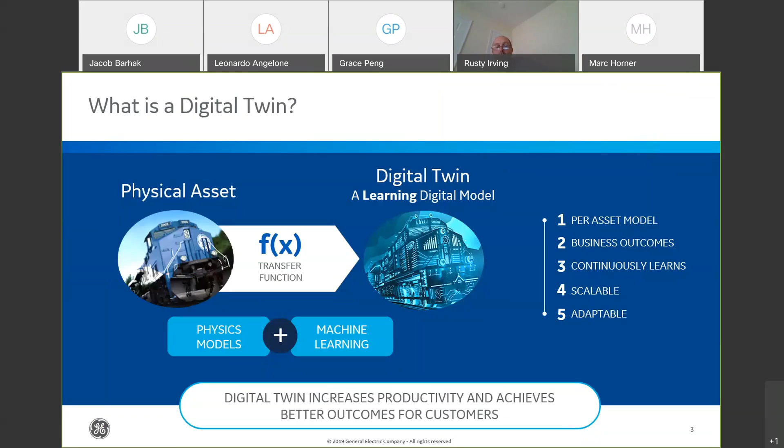For instance, it takes a lot just for one engine type to monitor 5,000 of these things — you need a lot of computer power. They're also very expensive to develop. On average, a team of half a dozen people might take two years to perfect a useful model. So you have to do transfer learning so the model can be reused on another engine line.

I mentioned the path — this is important to appreciate. If we go back to the early 80s when we started using applied artificial intelligence, the predominant approach was just trying to answer what happened. Customers would notify us the asset was broken, and we had to do diagnostics to figure out what happened. Things were generally rule-based, which are just about impossible to maintain. We built this M&D, a monitoring and diagnostic center, so we could figure out overall, across all assets in a fleet, what's happening. You see the technologies listed there that started to come of age and become useful.

By the turn of the century, we were very good at doing the diagnostics, and we could change the time horizon to look forward and say, what will break? So we now are moving into new customer value because we anticipate when things would break and take action beforehand.

A decade later, the model fidelity got to the point where we knew how long things would last, and that gives you a whole other power of how to schedule maintenance. By about 2015, we realized we had enough models of each asset that the collection of models for an asset type really constituted their digital twin.

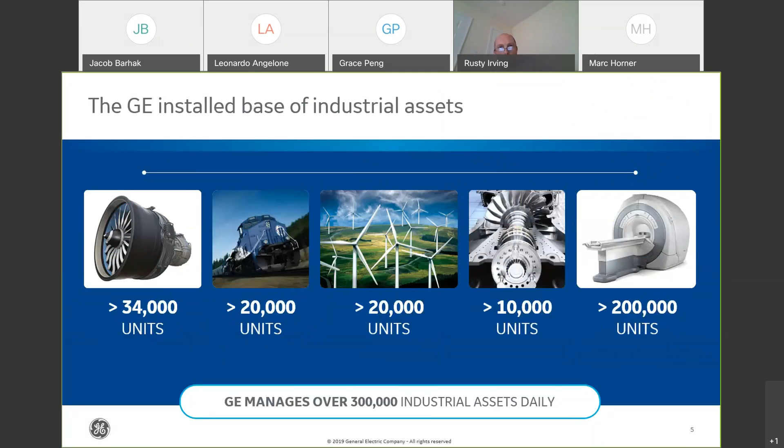The reason we did this is, for many years, GE takes in data, environmental conditions, operating parameters, and monitors over 300,000 specific assets a day. And we do this, again, for profitability. The oldest business 101 equation is profit equals revenue minus cost. We built digital twins and maintain them and run them because it helps lower cost, thereby increasing profit.

There's two ways we do that. By being predictive in nature, you can make better decisions about what to do and what not to do, and then when to do it and how often. And that just brings more money to the bottom line. So I'll go through a couple of quick examples.

In the case of an aircraft engine, a very expensive asset, starting price on an engine that goes on a 737 or an Airbus 320 is $10 million. And the customer expects to fly it at a minimum of 20 years, more likely 30, and they can go as long as 40 if properly maintained.

In the lower left, you see a picture there. That part is called a shroud. It's called a hot gas path part. And as I mentioned, when planes fly through the parts of the planet now that are high in particulate matter under 10 microns, they age like the one on top that doesn't look so new.

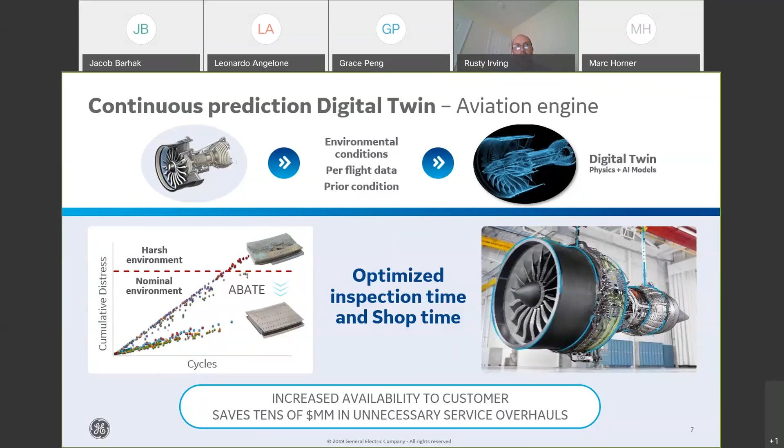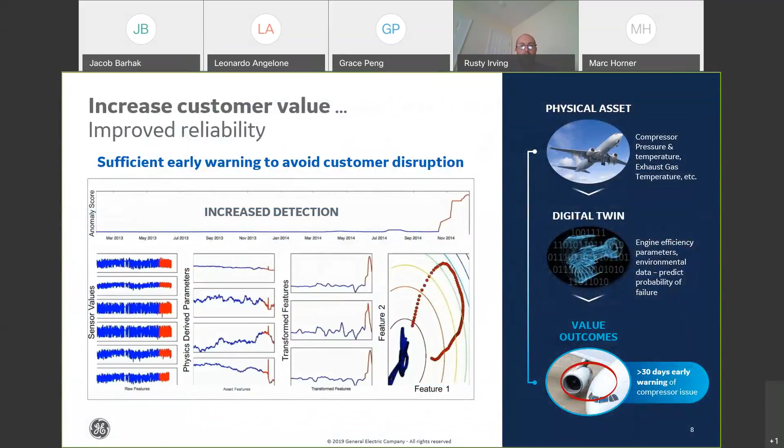Each dot in that graph represents a specific digital twin of an engine. And what we see as we fly them, cycles equal flights, you get two different populations. Our ability to do this—think about the absence of doing this—we wouldn't know which planes need service sooner. That is what allows us to change the game on how we run our maintenance and service operation for customers, and they get greater reliability from each engine because it's more predictable what happens. And also we get more availability.

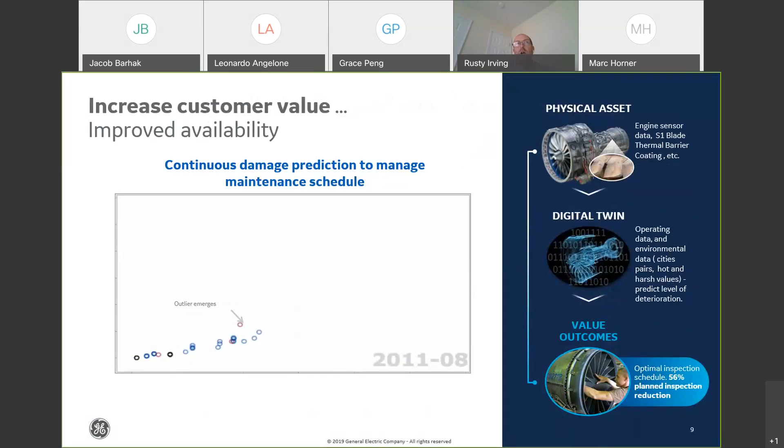This rather slow animation, I hope it comes through in the WebEx, shows what happens: we can fly a fleet of engines via their digital twins through time up to 2 years to see what fleet availability will look like. And that gives us the ability to work with a customer, and they can change the routes of the planes so that the engines last longer and they can manage their fleet much better.

We also can get more performance out of assets. So in the combined cycle power plant that's represented here, over time we've been able to understand the physics of how each specific plant, because they're all in a different geography with different humidity levels, altitude, all sorts of things, and advise how customers can essentially get more power out of the turbine without jeopardizing the life of the turbine parts.

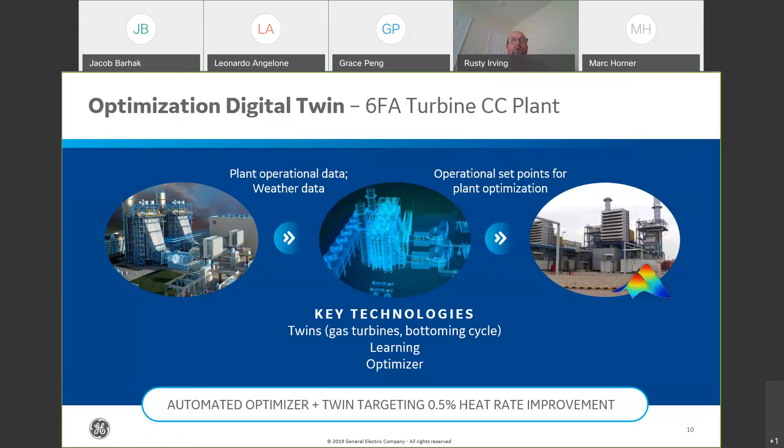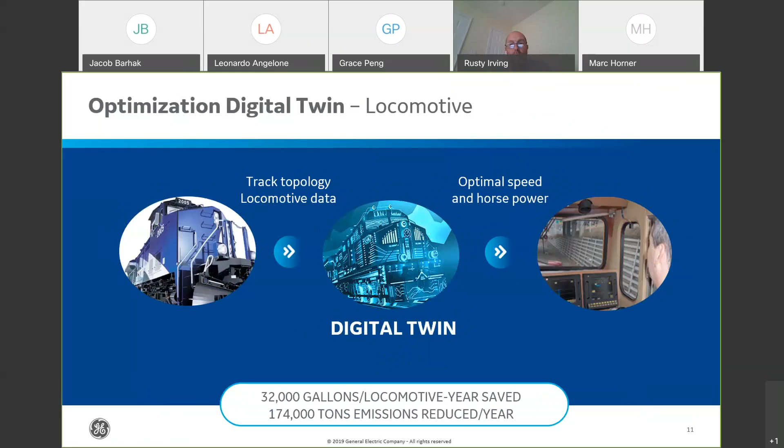Because when you turn off a power plant, they on average lose $600,000 a day per turbine in lost charging for the production of electricity. Going back to the locomotive example, we built a digital twin of an entire consist, in other words, the engines plus the cars, that enabled our railroad customers to get 10% lower cost in fuel, which is their top two variable costs.

I want to just close, being mindful of time. There are several types of twins. As I said, we can focus on parts, which is the majority of these things—we don't really do the whole product very often. The technology also works for processes, so we've applied this in supply chain. And the system twins is like the example I gave of flying a fleet forward a couple of years.

That was, again, a very quick treatment of how we defined it and how we built it, and that's my 15 minutes, so I'll conclude there.